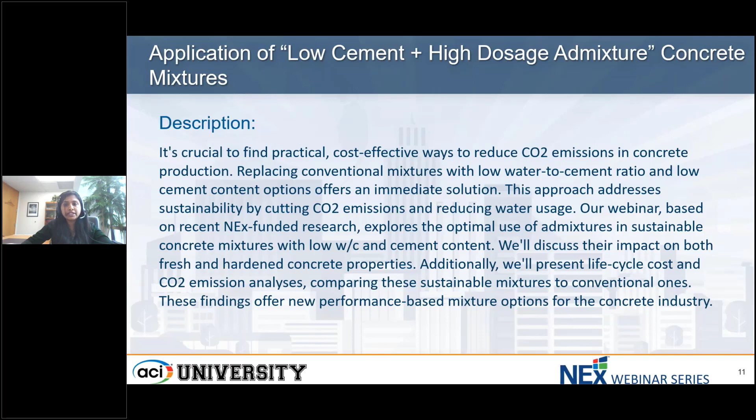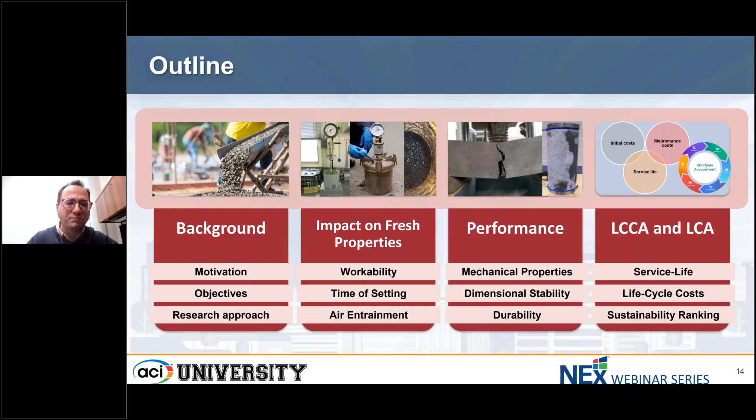So the motivation for this study: obviously there's a big pushback in our industry to reduce the CO2 emissions from cement and concrete production, and we are looking for different alternatives to do so. But the goal of this project is how we can do this with a more simple and fast approach, basically.

If you look at the right image, we have different components of our concrete mix, the basics, right? We have water, cement, aggregates, and air. So here we say if we reduce the water content and reduce the cement content in our typical mix design, we can reduce CO2 emissions by 200 million tons annually if we reduce the cement content by 10%. Also, if we reduce the water to cement ratio by 5%, we can again reduce CO2 emissions and water usage by 100 million tons annually. So that was the big motivation behind this project, which is funded by NEx.

So we wanted to develop this low cement, low water cement ratio, and high admixture sustainable concrete mixtures. Probably I'd say this is not a new approach.

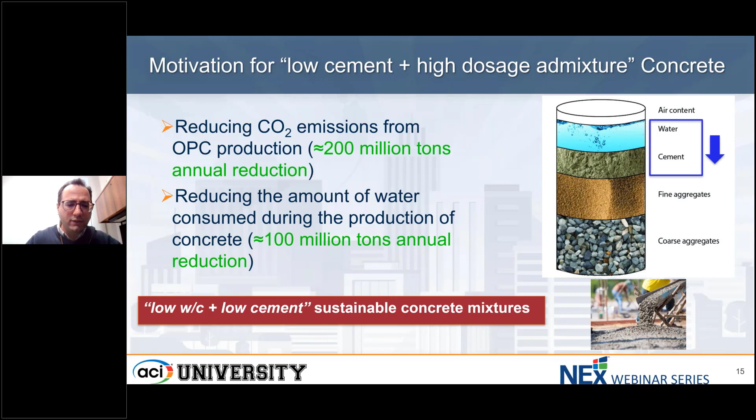We've seen this, but the goal here is really to take a different approach to make it more practical, and show overall how it impacts the different properties, and the life cycle costs and environmental impact with systematic research, showing the benefit to the industry through this comprehensive study.

So these are the main objectives for this study. We want to optimize the system for this type of mix design with low water cement ratio, low cement, and high admixture. We want to quantify the impact on fresh and hardened properties, and then at the end, see the impact on initial cost, life cycle cost, and also the environmental impact.

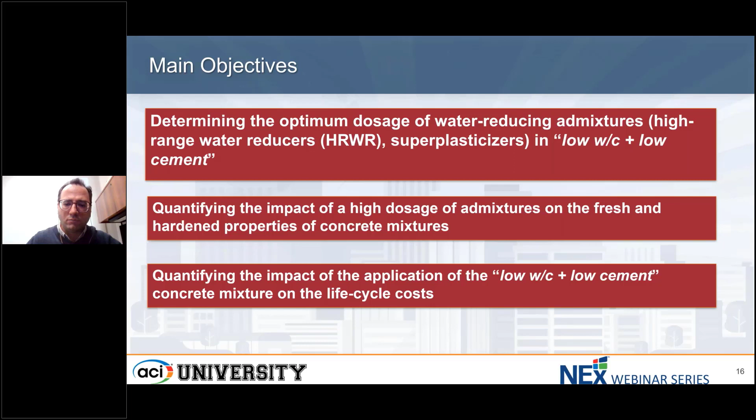So here's very basic information on the approach we took. I have this graph on the right side based on ACI 211, which is typically what we use for our mix design. So if I'm targeting a 4-inch slump for my mix design and the maximum aggregate size is 3/4 inch, and I'm assuming the typical water cement ratio I use is 0.42, then for that 0.42 I'm showing the range of water content versus cement content I can apply, depending on that the amount of admixture I use to improve workability is going to be different.

And as I said, the goal is to reduce the water cement ratio by 5%. That's why I'm also showing the 0.37 graph, again based on ACI 211 requirements.

So the approach taken: we are assuming we start with a mix design at this point with a 0.42 water cement ratio, to give us that 4-inch slump with a certain high range water reducing admixture. The first thing we do is optimize this mix design. By optimization, I mean the aggregate optimization. So we're going to have two mix designs at this point: one is what we call the control mix design, the other is optimized control.

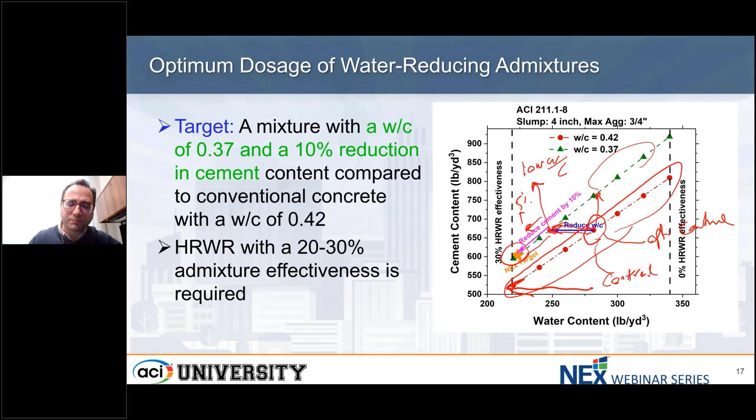So as I mentioned, we have to optimize our aggregate system for this purpose. To do that, in our experiment we used number 57 aggregate, number 8, as well as our sand. As a preliminary approach, we used this Tarantula curve, which gives us the combined gradation for concrete and aggregate, and we want to stay within these boundaries. So we changed the proportion of these three different aggregate sizes to make sure we stay in that range, and this is an example I'm showing here.

And again, the purpose here is to improve the packing density and reduce the void content, so we need less cement, or paste, to fill those voids.

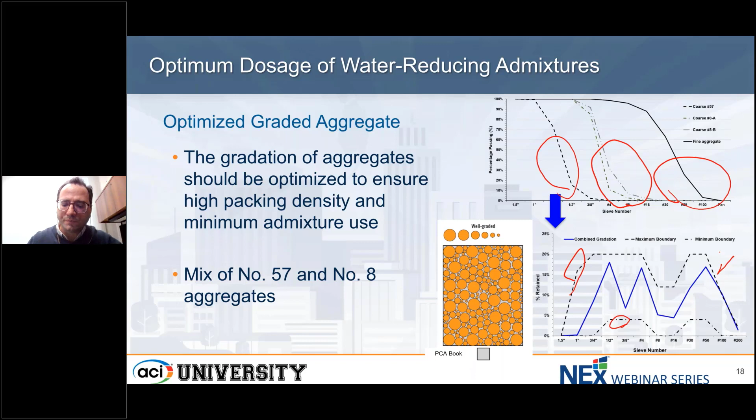Here are the mixed designs we have. So we have control, optimized control at the initial point. The difference between those two, again, the optimized control, we optimize the aggregate system. Both of them have a water binder ratio of 0.42.

Then we have low water cement ratio with 0.37 water cement, and we reduce cement by 5% for one mix and 10% for another. So when we move from control to the low water cement ratio, 10% low cement mix, the high range water reducer admixture content changes from 0.35% of the binder weight to almost 1.1%.

This is almost 3 times increase in the high range water reducer content. Again, the target slump is 4 inches, to make sure the concrete is placeable. So these are some examples: control, optimized control, and on the right side, low water cement ratio 10% low cement mix. In control one, you see a little bit of bleeding in the system, but by optimizing the aggregate, we get a more cohesive mix design.

So these are some metrics. I didn't want to bore you with a table, it's more about how we move from higher content to lower content. So cement for control one is 670.5 pounds per cubic yard, and we reduce that by 10% for this sustainable mix to 603 pounds per cubic yard.

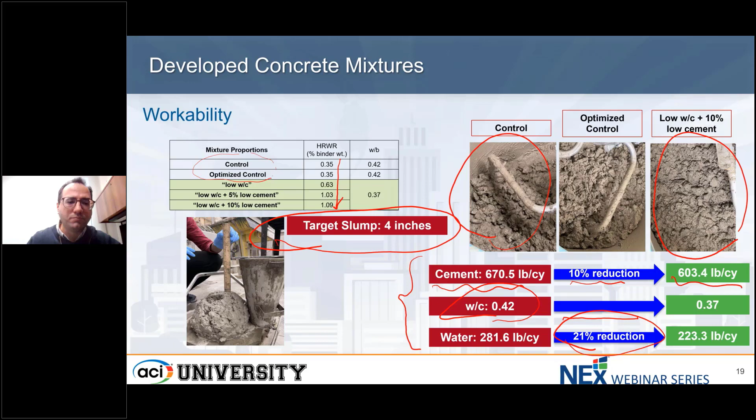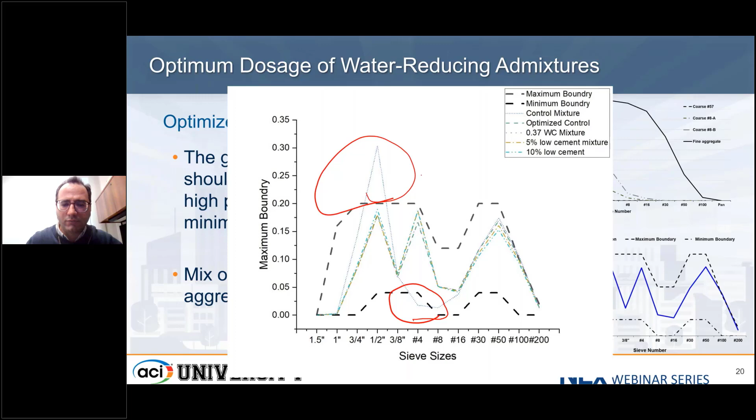The other fresh property we looked at is time of setting. We wanted to see how this high range water reducer with high dosage impacts the time of setting. These values are based on ASTM C403. You see the setup here, where you measure the initial setting and final setting time.

If you compare the results, really the result is within plus or minus 10-15 minutes for the low cement or sustainable system compared to the control one. So we don't see much impact from using this high dosage admixture content.

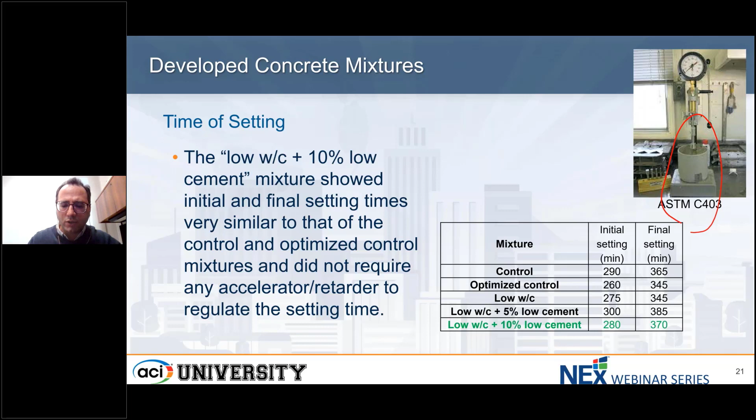The other important fresh property is the air content. As we know, when using a high dose of water reducing admixture with air entraining admixture, that can impact the quality of our air content, it can reduce air content and destabilize the air entrainment. So we wanted to see how this new system we are developing impacts that air content requirement.

To do that, we use the foam index test shown at the right side. We tested different concentrations of high-range water reducer and measured what air entraining admixture content is required to have a stable foam index. As you can see, when we move from the control system to the sustainable low cement 10% one, we go from 400 milliliters per 100 kilograms of cement to almost 1400. So that's the proportional increase we expect in air entraining admixture.

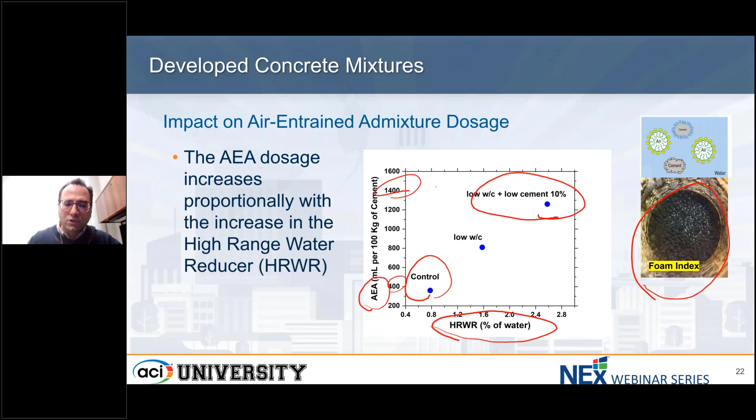So we used this preliminary data to design our air entraining mixture. The target for air entrainment was 6.5% air content. We required 18 milliliters per 100 kilograms of air entraining admixture for the control one, while for the optimized mix with low water cement ratio and 10% low cement, we required 45 milliliters per 100 kilograms. That's almost 2.5 times more air entraining admixture to reach that target air content.

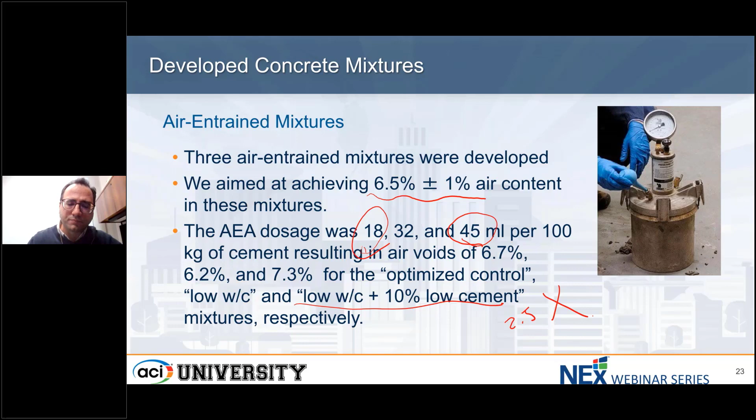Other than the fresh properties, we looked at hardened properties, starting with compressive strength. We used ASTM C39, made 4x8 cylinders, and cured them for different times in submerged lime water, from early ages of 3 days, 7 days, up to 90 days. This is the data set you see on the right side.

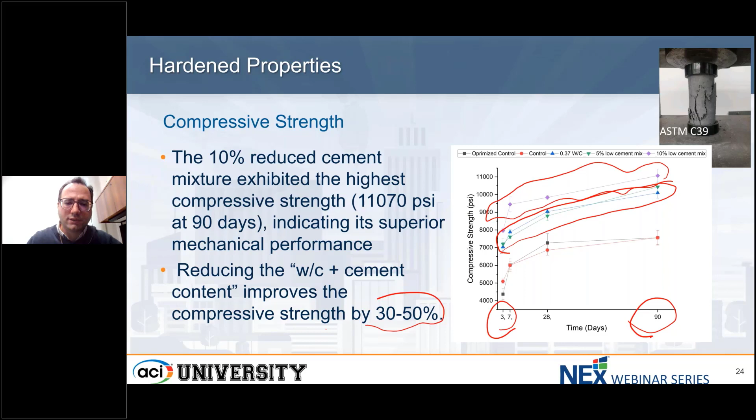As expected, when reducing the water cement ratio, we see higher strengths. But I want to highlight the performance of the low water cement ratio 10% reduced cement mix, shown here in purple. At early ages and long term, it performs superior compared to all other mix designs. Later on we'll discuss that the main reason is reduction of void content, or improving the packing density of the system in this type of mixture. We see almost 30 to 50% improvement when comparing this mix design with the control mix designs.

The other mechanical performance we tested was flexural strength. We took beams, 4x4x16 inches, tested based on ASTM C293. These are the results after 28 days curing and after 90 days curing. We see a similar trend compared to compressive strength: the optimized system with low cement performs better than the other systems, with almost 35% increase in the modulus of rupture after 90 days of curing.

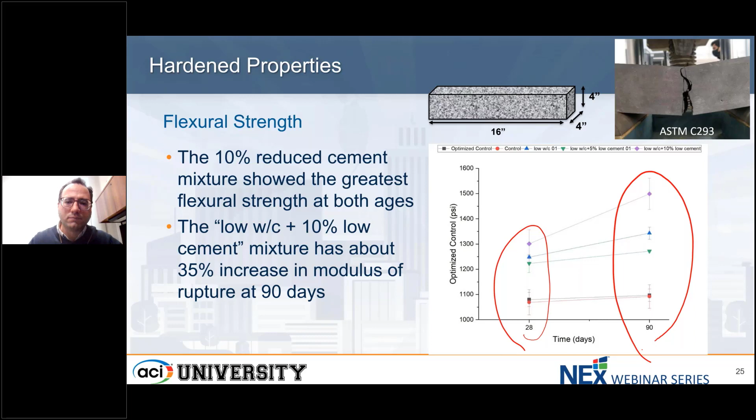We looked at dry shrinkage as a dimensional stability performance criteria. The approach we took was to cure our beam samples for 7 days in wet condition, then air cure the systems inside an environmental chamber at controlled conditions of 50% relative humidity and 23 degrees Celsius temperature for 32 weeks.

The results are shown on the right side. At the beginning, the initial wet stage, the control system had more expansion, due to its higher cement content. When we look at the dry shrinkage data, we see pretty comparable results between our optimized low cement mix design and the control one. Even if we subtract the impact from that initial expansion, they perform maybe a little better than our control. Overall, the shrinkage performance is comparable for the developed sustainable mixes compared to the control.

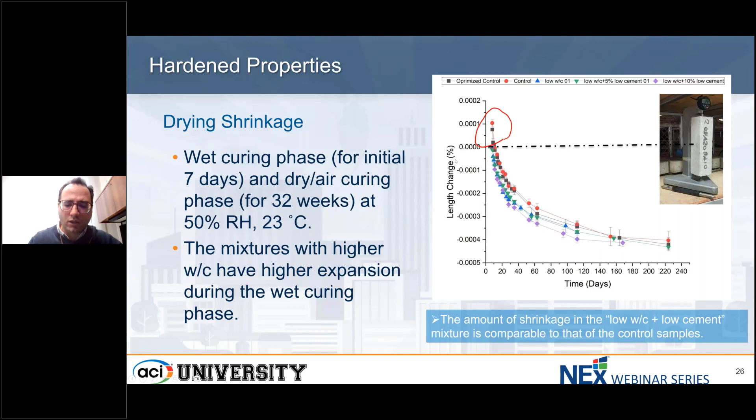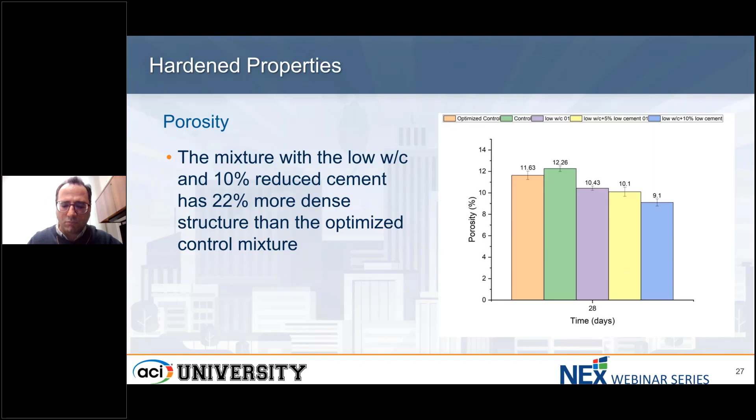We see the porosity for control number 67 is 12.3 percent, and it reduces to 9% for the low cement, low water-cement ratio system. That's almost 22% lower porosity, or a denser microstructure, for our optimized sustainable system. This correlates very well with what we discussed in the compressive and flexural strength experiments, the impact from higher packing density and improved microstructure.

We looked at the mass transport properties to connect this to the durability performance of our mix designs. The first one we looked at was the bulk electrical resistivity, based on AASHTO TP 119, as shown here.

We measured on 4x8 cylinders after curing time, saturating the samples. This basically measures the resistance of your sample, or pore system, to electrical current, which indirectly measures how well it will resist different deleterious material intrusion. Based on the test results, we have around 1.5 ohm-meter for our control system, and that increases to 2.66 for our optimized low cement, low water-cement ratio system. That's almost 70% improvement in this bulk electrical resistivity measurement.

Later on, we're going to discuss how we can use this electrical resistivity measurement to predict the formation factor. Basically, you divide these values by the pore solution resistivity, rho zero, and that gives you the formation factor, which you can connect to the diffusion coefficient, used to estimate the service life, for example in a chloride environment.

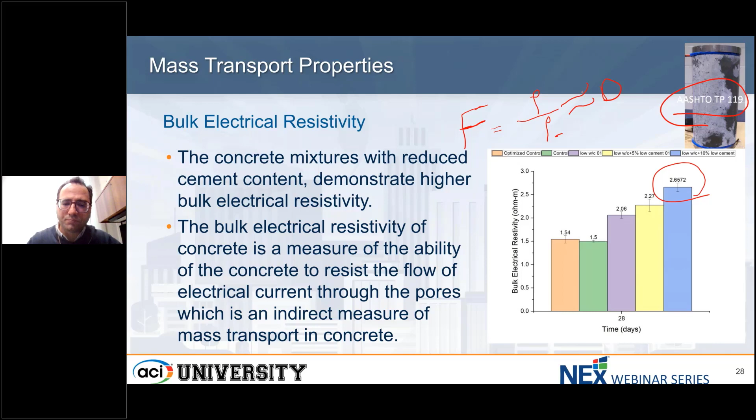The other mass transport criteria we looked at is water absorption, based on ASTM C1585, as shown at the top right image. After curing time, we seal the sample sides, and then expose them from the bottom to water for about 10 to 14 days. These are the results based on the absorption.

Obviously, when lowering the water-cement ratio, we should expect lower absorption amount and lower absorption rate. But the other performance we are seeing is that the 10% low cement mix performed better than any other mix, with the rate of absorption reduced by 40 to 120%, considering the initial absorption rate as well as the secondary one. This means the permeability of the system, considering water absorption and bulk electrical resistivity, improves with this optimized system, correlating to lower risk when exposed to freeze-thaw environments or chloride-induced corrosion.

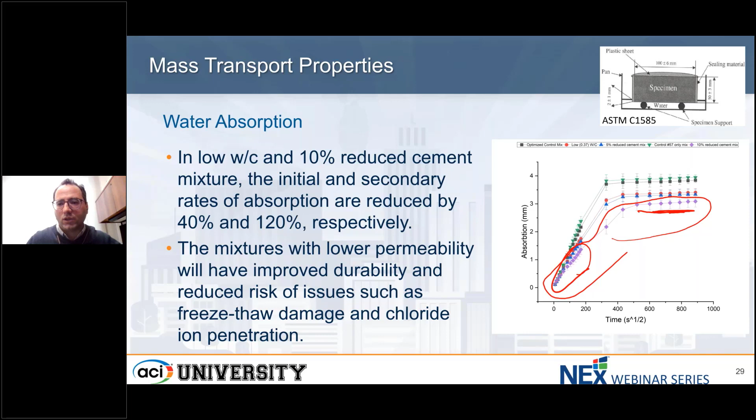So the other criteria we looked at is the life cycle cost. We want to see what the life cycle costs are and what the impact is of using high admixture, low cement mixtures compared to the control, the typical one used in the industry. This is from literature.

You can consider different criteria in the LCCA model: material cost, construction cost, maintenance, repair, and end-of-life cost. Most of these criteria are consistent between our mix designs. The main ones varying here are material cost, because we're changing the material content or proportions, and also the service life, the performance, and how that performance correlates to the repair and maintenance cycles, and obviously the life cycle cost. So those are the main criteria we considered in our analysis.

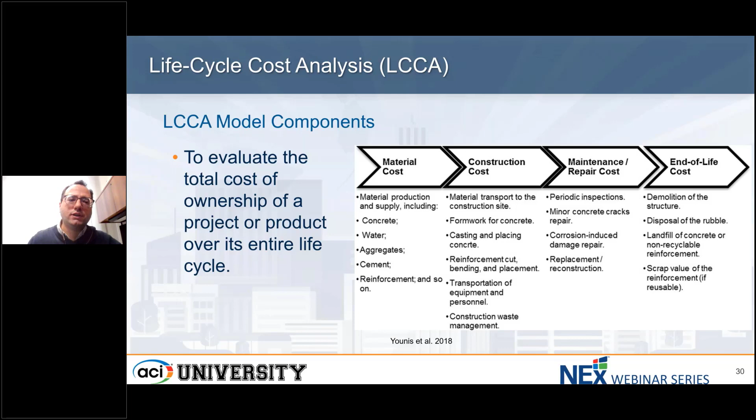As shown here, we accounted for the difference in the initial cost from changes in the mix proportion, the maintenance cost, and the service life.

The way we compare different mix designs: one, by taking a cubic yard of concrete for each of those mixes and comparing the life cycle cost. The other example we'll show, we took a bridge deck section around 10,000 square feet, with this thickness and cover depth, and showed the life cycle costs for that particular section of the bridge, located in the Philadelphia region.

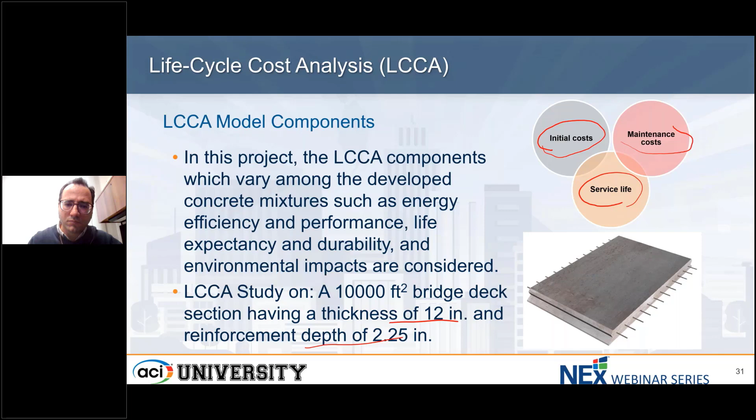For the initial material cost, we took the initial cost from literature and different sources, and based on that raw material cost, we calculated the initial costs for different mix designs per cubic yard. That's what you see in this bottom table. For the control mix it's around $144 per cubic yard, and it increases to $160 for the low-cement, 10% low cement mix. The reason for that is we're using a higher dosage of the admixture.

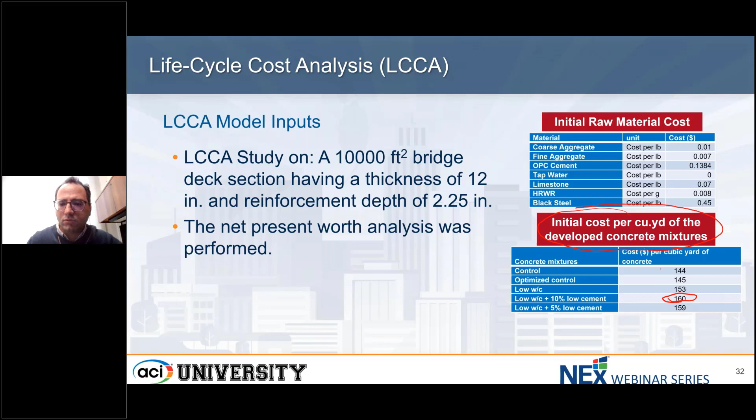The net present worth analysis is the approach we took for our life cycle cost analysis. For deterioration consideration, which is important in the life cycle analysis, we assumed our main deterioration factor is going to be corrosion due to chloride intrusion.

To calculate the service life in that environment, we used the Life-365 software. It's open access software which uses Fick's second law to predict when the concentration of chloride at the rebar level is going to reach the critical level, which we assume is 0.05% of the concrete weight. For surface chloride buildup, we took the database for the highway bridge in Philadelphia, as I mentioned.

For the diffusion coefficient, we didn't get the values from the software; we put in values based on our experiments. As I mentioned previously, from the bulk electrical resistivity measurement we calculated the formation factor, and then based on first principles we correlated that to the diffusion coefficient, which we can then use with Fick's second law to predict how long it's going to take to reach that level.

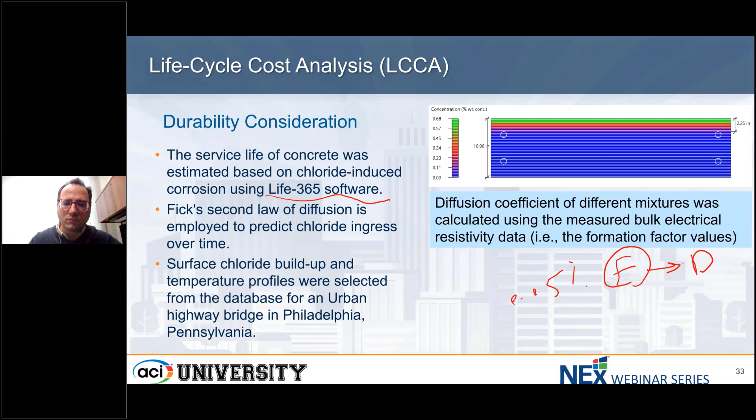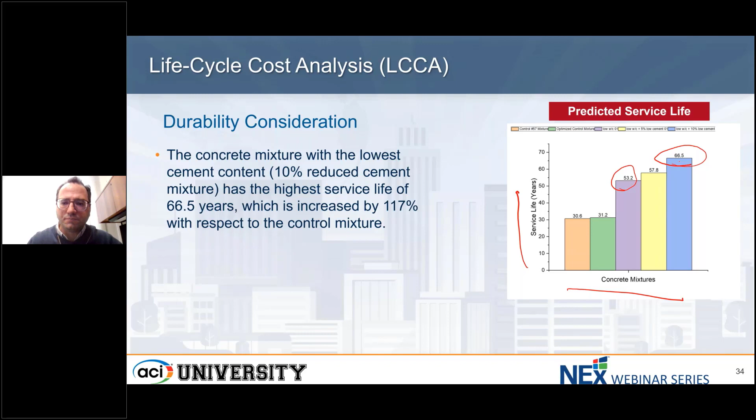For maintenance and repair, we assumed we'd repair 10% of the bridge deck area, with an assumed cost per square foot for the repair. The long-term inflation rate we assumed is 3.28%, the discount rate 3%. The analysis period we assumed is 100 years, starting from 2021. Based on this, once you reach the service life we discussed, you start the repair every 20 years. That's the assumption we made in our analysis.

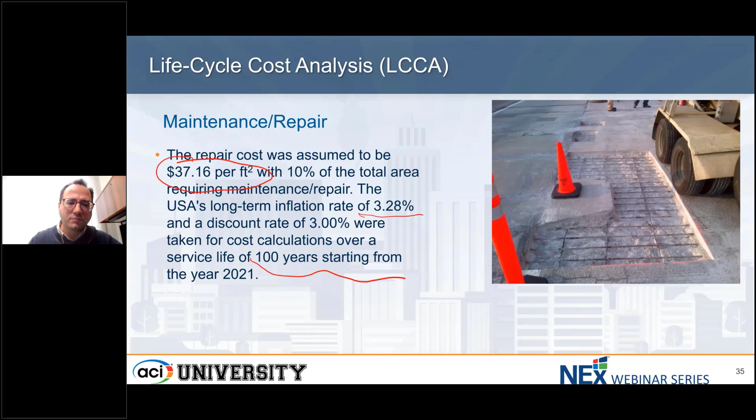So based on what we discussed, this is the life cycle cost for one cubic yard of concrete for the different mixes we developed. Starting with the control mix, around $1,088 per cubic yard, and it reduces to $774 for our low cement, low water-cement ratio system. That's almost a 29% lower life cycle cost when comparing that sustainable system with the control system.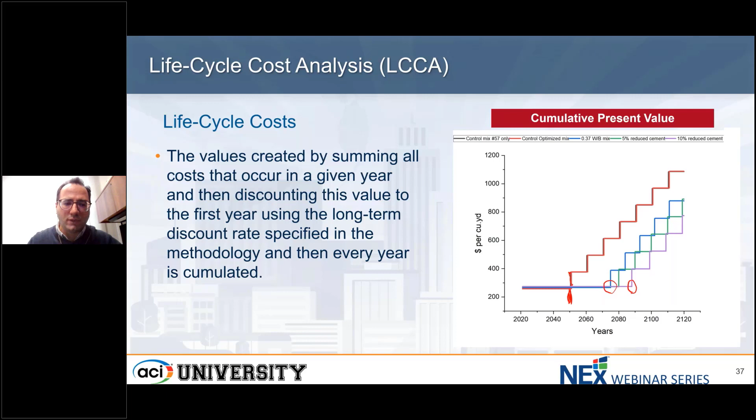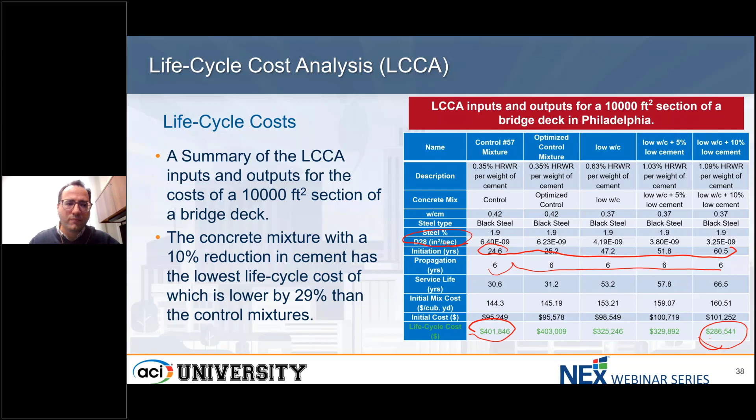From the sustainability perspective, we want to see what is the real impact from use of this mix design on some of the sustainability indicators. So to do that, we've done a life cycle assessment analysis.

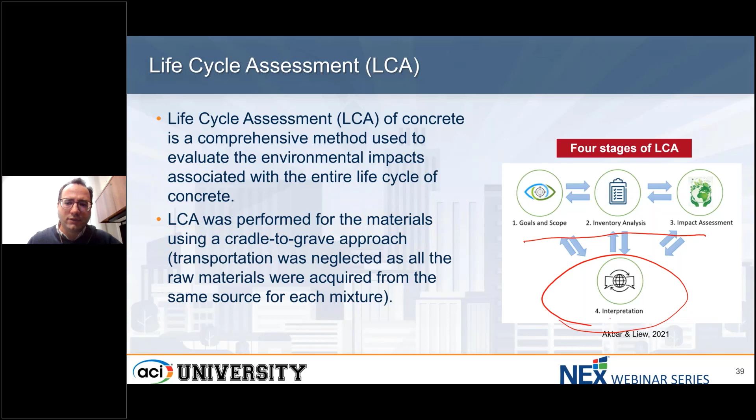We use the cradle to grave approach here. We assume the transportation cost or impact is about the same for all the mix designs we have, and these are the 4 different stages of the life cycle analysis you have to consider. For this study, I'm going to be brief and present a very summarized version. We assume the functional unit is 1 cubic yard of concrete, so that's the unit we take to compare the environmental impact.

We have to do comprehensive data collection for raw materials, the energy cost associated, and other criteria. So, especially for raw materials in this study, the high range water reducer, the OPC cement, we collected data from literature, from the EcoInvent database, US life cycle inventory, and so on, to make sure we have a comprehensive data collection in this stage.

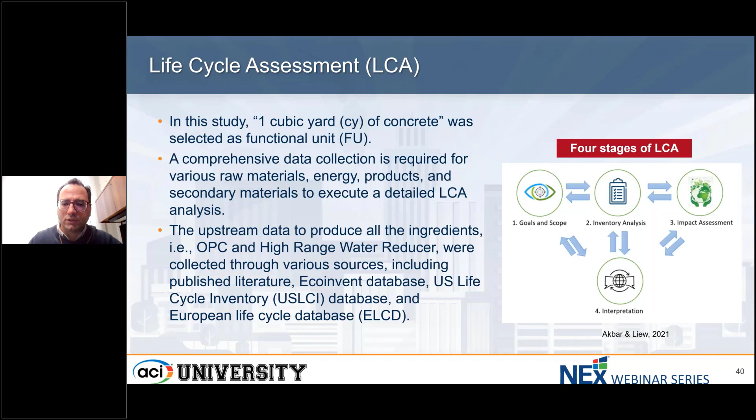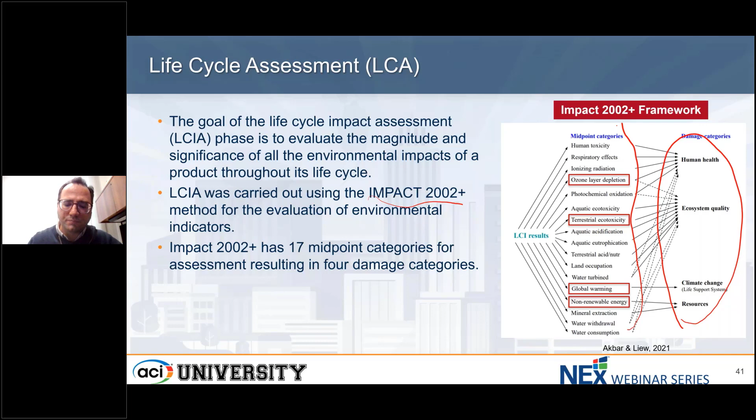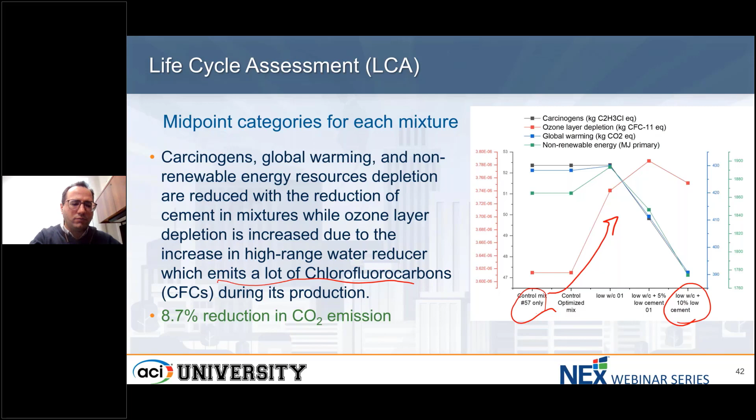But the most common indicator we use in our industry is CO2 emission reduction. So if we compare the control system to the low water cement, low cement system, moving from that control system to that sustainable system, there's an 8.7% reduction in CO2 emission, which I mentioned here.

Okay, so we discussed different criteria, right? The mechanical performance, the durability performance, the life cycle cost, and the sustainability aspect of our mix design. So at the end, we wanted to really rank, based on different criteria we have, what is the ranking for different mix designs we developed.

The second one is the durability, so we considered the service life data here. The third one was the sustainability. So the 4 categories we discussed in the previous slide, we consider the combined effect from those 4. And lastly, life cycle costs - we take into consideration how the life cycle is going to impact overall.

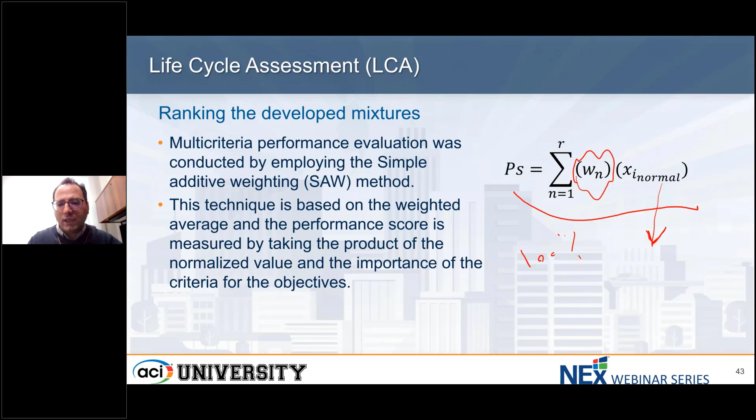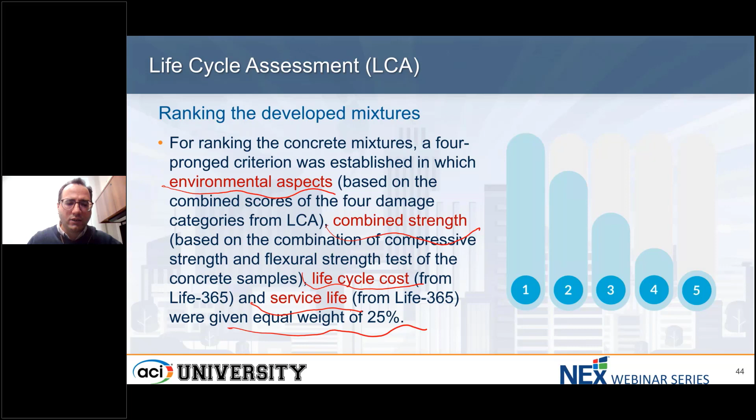So the other important factor here is the different weights you are putting on these different indicators. You are dividing that 100% to the different criteria we discussed. Depending on the importance, you can put a different weight. But in this project, we assume the weights are equal, and for each of the criteria we are considering is 25% out of that 100%. So again, we have environmental aspect, combined strengths, life cycle costs, and service life as the 4 different criteria we are taking into account for ranking of different mix designs, and we are assuming they have equal weight.

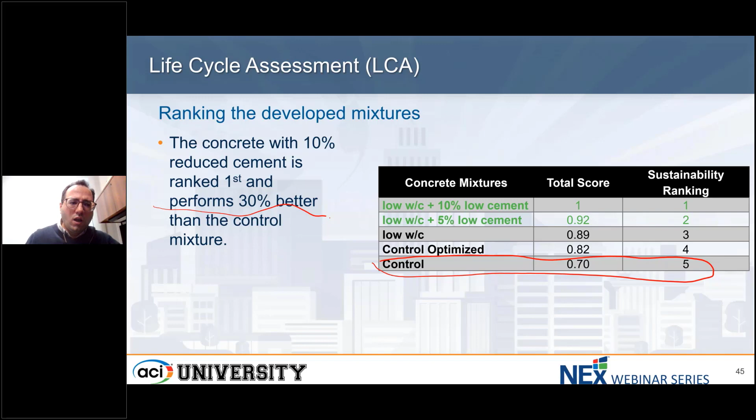So based on what we discussed so far, these are some conclusions we can derive based on the data we have. The low water cement ratio, low cement system with 10% reduction in cement requires 3 times higher high range water reducer content to satisfy the workability requirement, which is the slump value. The setting time impact was not much - the data was comparable. For air entraining admixture, the required air entraining admixture content increased by 2.5 times to achieve the target air content. The developed sustainable low cement system improved the mechanical performance by almost 30 to 50%.

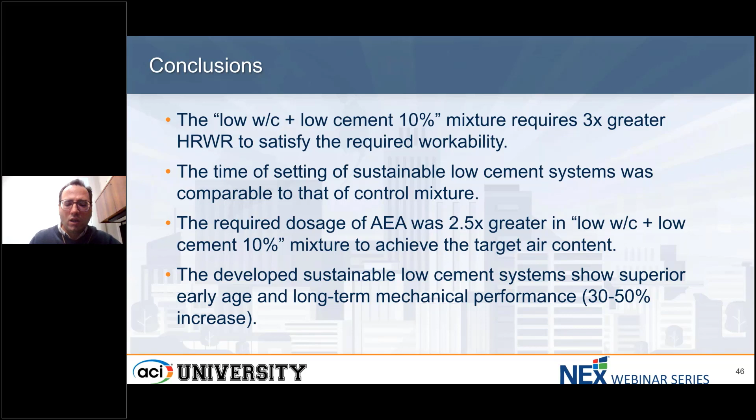When we look at the shrinkage drying performance, it was comparable between the developed optimized systems and the control ones. When we look at the permeability mass transport criteria, we saw improvement by using this low cement, low water cement ratio optimized system, which again translates to improvement in the durability of our structure in a harsh environment.

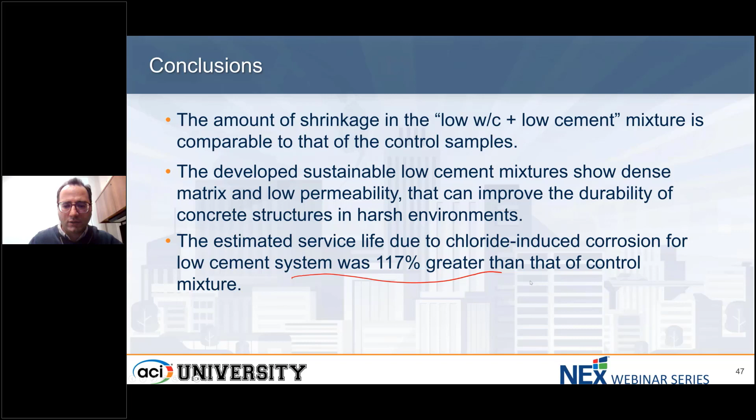And if you remember, based on our prediction, we saw almost 117% increase in the service life when your concrete is exposed to chloride-induced corrosion. The concrete mix with 10% reduction in cement has the lowest life cycle cost based on our calculation, almost 29% lower. Based on life cycle assessment, we see reduction in CO2 emission by 8.7% when comparing to the control systems. And based on our ranking, the 10% reduced cement, low water cement ratio mix design ranked first and performs 30% better than the control.

So the general conclusion can be here, based on what we discussed and the data we gathered. The developed low cement optimized system can be an immediate solution to reduce the CO2 emission from cement and concrete production. In other words, we don't need to look for magic in our industry to reduce the CO2 emission and make our system more sustainable. We can optimize our system, make sure it's placeable, performing better, and has lower life cycle costs. Regarding the initial costs, maybe if we consider the incentives from the reduced CO2 emission, it can compensate part of that initial cost increase in these developed systems.